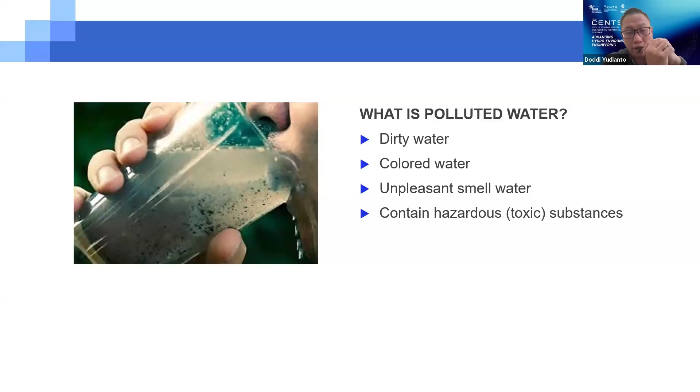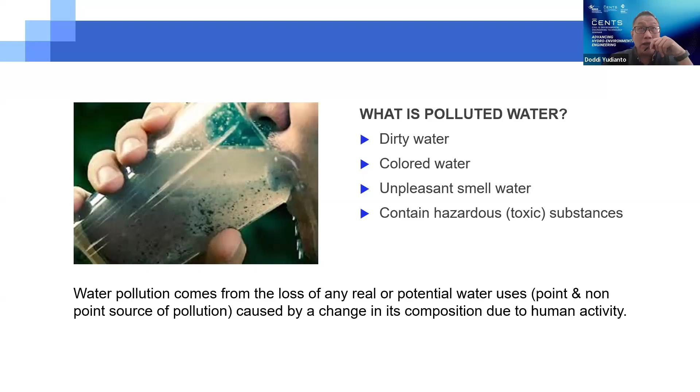Water is defined to be polluted if it contains toxic substances. And where do these toxic substances come from? It can come from the loss of any real or potential water uses. It can be point or non-point sources of pollution. Point sources can be like outfalls from industry, while non-point sources can come from agriculture areas or paddy fields. And because it contains toxic substances, of course, it will be very harmful for human health.

So the major questions are: what are the pollutants? When we define this as polluted water, what actually are the pollutants inside the water? Then, how badly is the water polluted, how rapidly is the water degraded, and how are the pollutants transported? And the last, most important thing for environmental protection and for us, is whether this polluted water is harmful to human health and how we can restore the conditions.

So the fact is, I think you are all aware that our environment is now badly polluted. We have so many regulations, but the implementation of the regulations is very weak. In many developed countries, they try to deal with polluted water using technology. While for Indonesia, we can say Indonesia is still a developing country, but to afford very expensive water treatment technologies, I'm not sure if all communities or even local governments can afford the financial side.

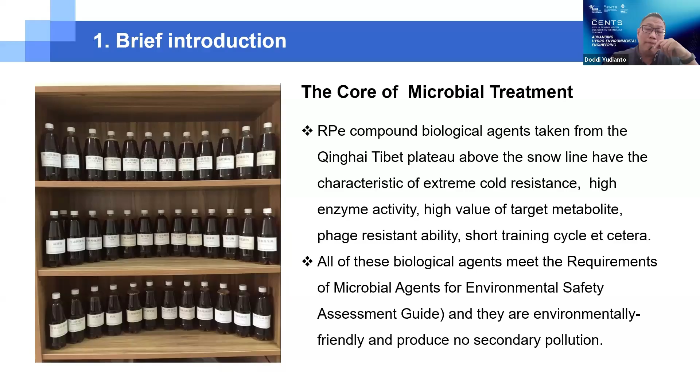He was thinking that when we go to very high elevations, this is in Tibet, where the elevation is above 5,000 meters, the oxygen is very limited. So when we extract the microorganisms, in this case certain types of bacteria, from the natural sites in Tibet at these elevations, we believe these microorganisms can help us decompose the polluted water.

Why? Because in polluted water, the oxygen is very low. So when we apply this kind of bacteria, hopefully this bacteria can help to decompose the organic matter or the pollutant itself. Of course, it's a natural process.

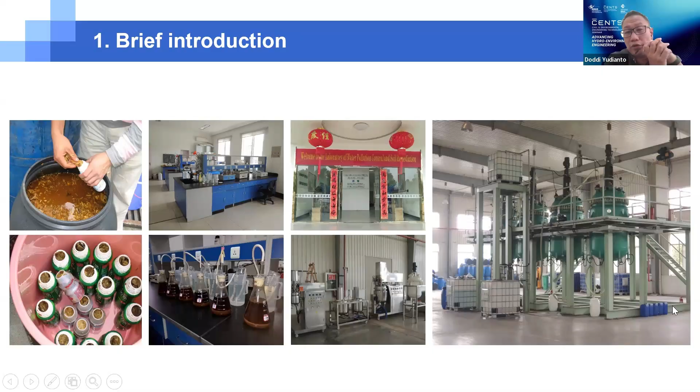And then they tried to culture the bacteria. As you can see here, they used Yakult bottles. So they put the materials into water, they try to ferment the bacteria, and then they test it in labs. And as you can see here on the right side, the biggest photo, this is the machine to produce the bacteria.

When my professor did these projects, he actually didn't know how much bacteria should be injected into the river, so he used trial and error methods. On June 4th, he injected about 0.8 tons of bacteria into the river. Then on June 13, he injected again 2.2 tons of bacteria into the river. And the last one is on July 31, about 1.5 tons of bacteria.

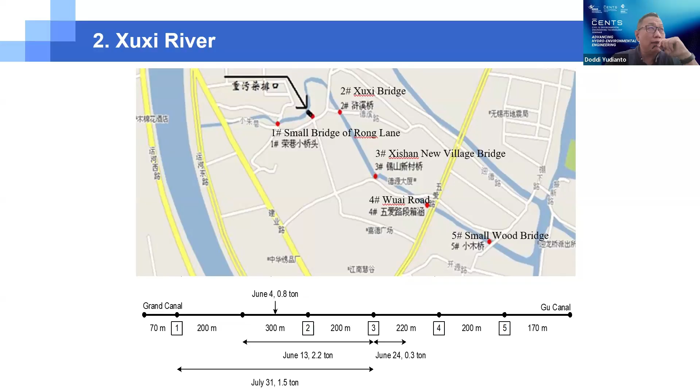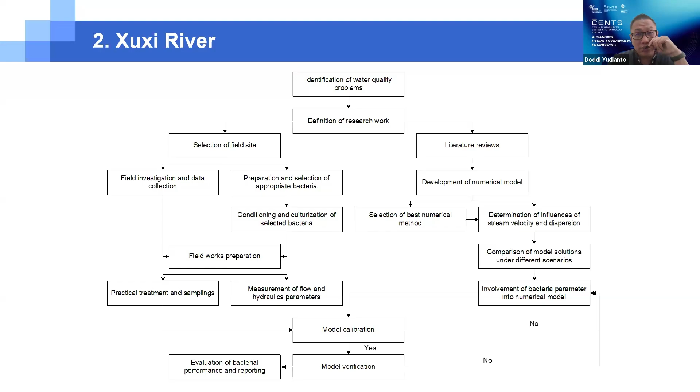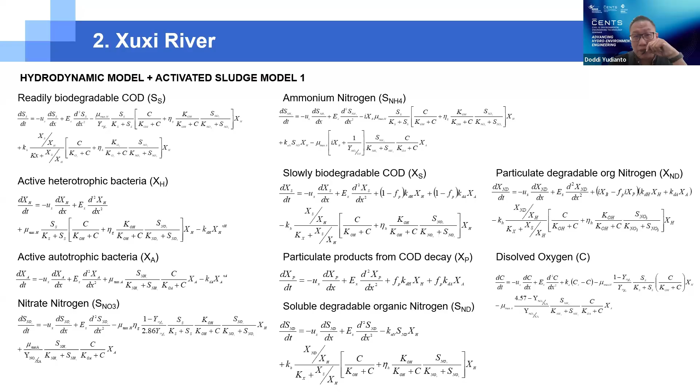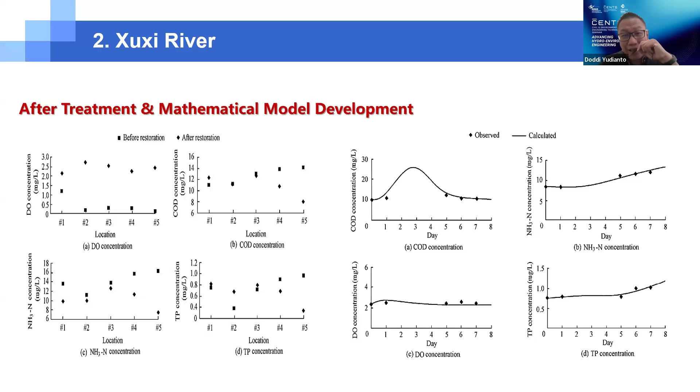And then by using my models, I could actually predict how the concentration of each parameter looks like. I did this for at least these 4 parameters, and it works well. So that means using this model, I can estimate how much bacteria should be used in the bioremediation process, where the bacteria should be injected, and when it should be injected again after the first injection.

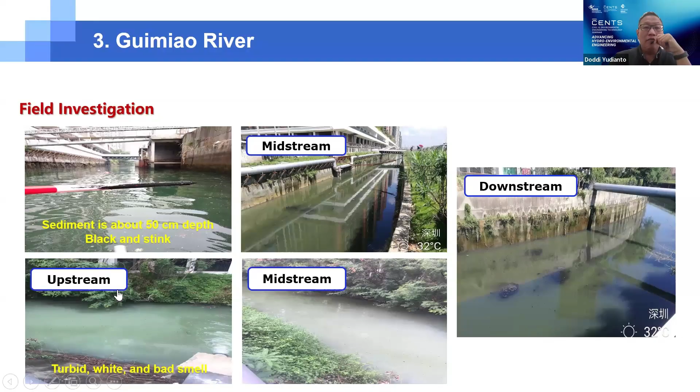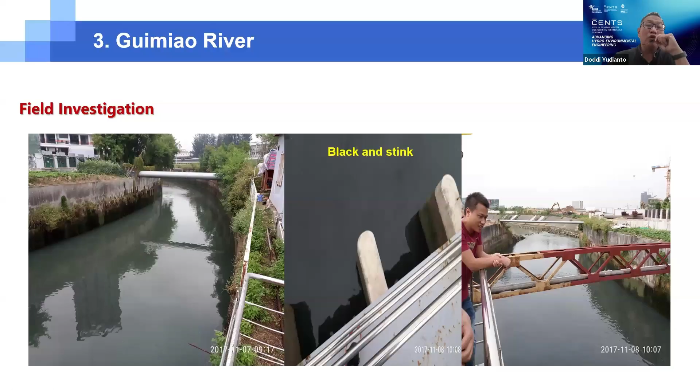And then this is a recent example of a bioremediation project. This comes from the Guimiao River. This is the situation of the river before treatment, from the upstream to the downstream. As you can see here, the color is very black, and it stinks. The smell is not good at all. And then we tried to inject the bacteria. This is now the bacteria.

They developed the technology. They don't only use the weir at the downstream, but they try to develop the bacteria under the riverbed. So how? This is the technique. They find certain types of stones where they can grow the bacteria inside the stones. Then they soak all these stones in the bacteria in very big tanks or reservoirs, ponds of bacteria, for about 1 month. And after that, they line all these stones on the riverbed.

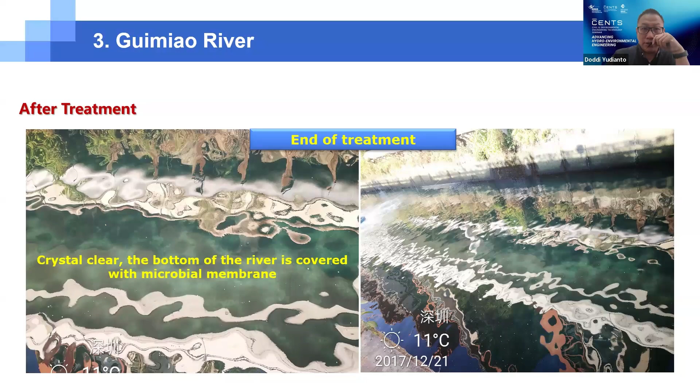And this bioremediation technology is not only used for rivers, but also for communal septic tanks. We also did a project at a communal septic tank in one school. This is the situation before treatment. A lot of waste inside the septic tank, and then we tried to separate the solid waste, and then we injected the bacteria. This is the result: 45 days, 90 days, and this one is after 135 days. You can see the water looks very clean.

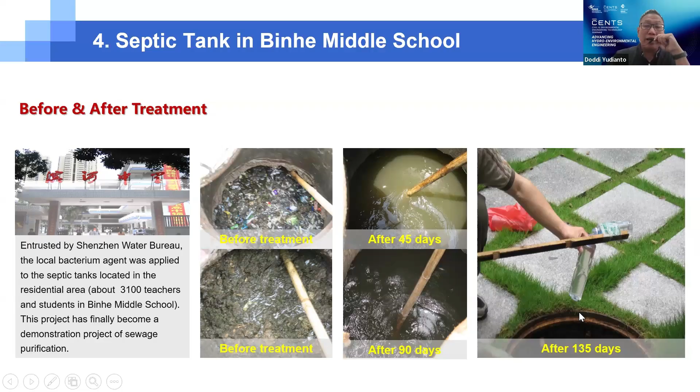And they also use the bioremediation technology to restore a reservoir. This is like a small dam. As you can see, in the initial condition the water looks very green, but after 1 month, this is the result.

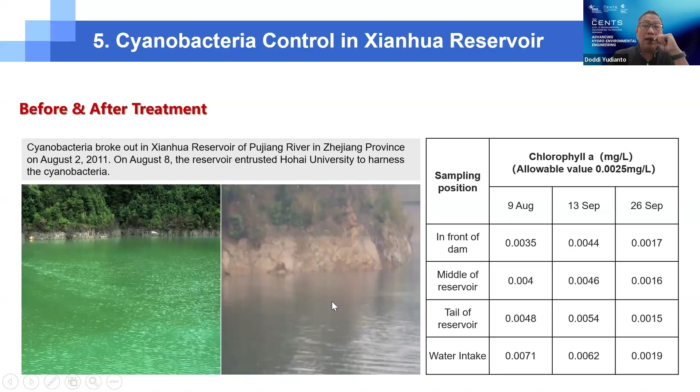And this is my photo, in 2006, when my professor took me to the wastewater treatment plant. This wastewater treatment plant was closed by the government because it discharged effluents beyond the national standards. So the government closed the treatment plant, and my professor was appointed by the government to solve this problem in 6 months.

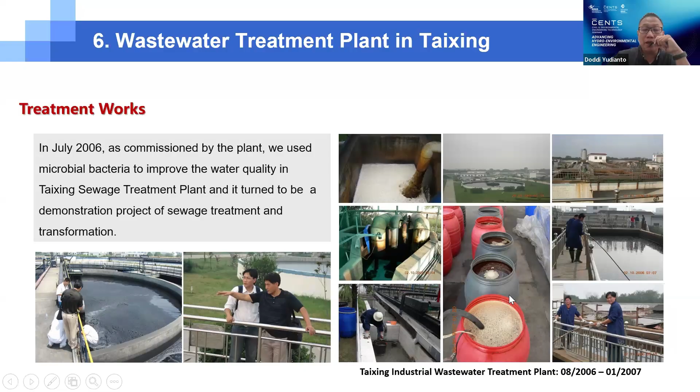So again we injected the bacteria into a treatment storage tank in the treatment plant. As you can see here, there are several processes in the treatment, but this is what is very important: the removal rates of the pollutants. One is the ammonia, and the second one is the chemical oxygen demand.

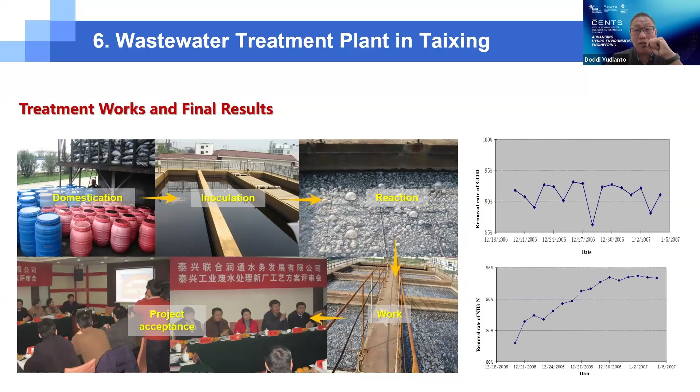The removal rate, both of them above 80%. Okay, so that means this technology works very well. Okay. And then this is also another example.

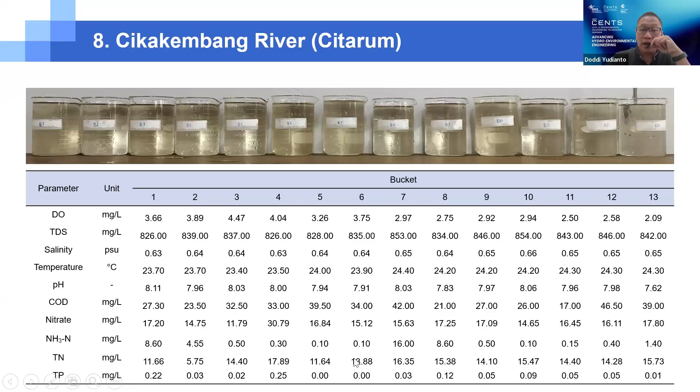So this is what we did, and then this is the last one I did also in Indonesia. I applied the bacteria developed by my professor in Indonesia in the Citarum River. As you can see, this is a laboratory test. We measured all the parameters, and then we observed for a few days. We tested the water for 9 days, and as you can see, the removal rates of COD, nitrate, total nitrogen, and also total phosphorus are very good.

So when we ask how we can apply this technology in Indonesia, of course, it's a very potential technology. But we have to be careful, because when we import the bacteria from China into Indonesia, there will be so many issues. So to deal with this, we have to develop the technology in our country. Okay, and then this is also another example.

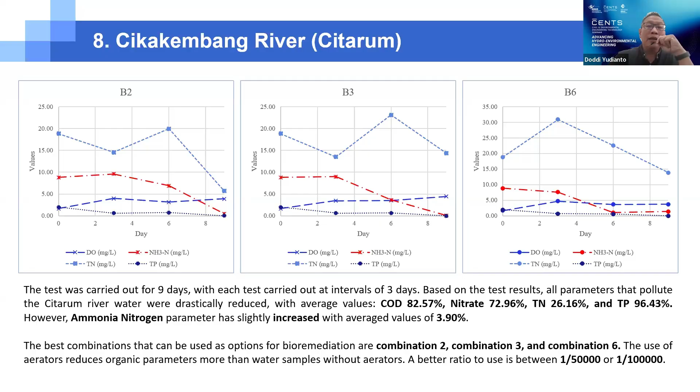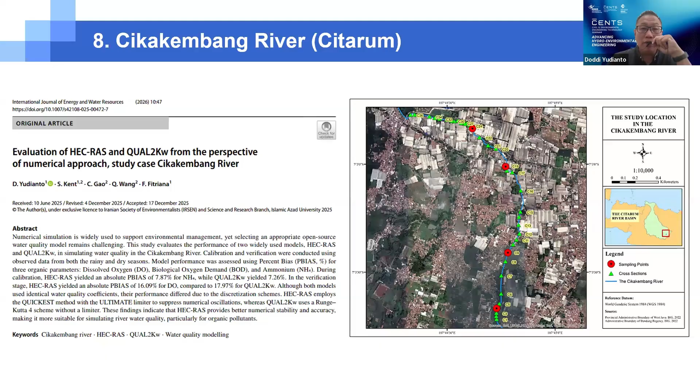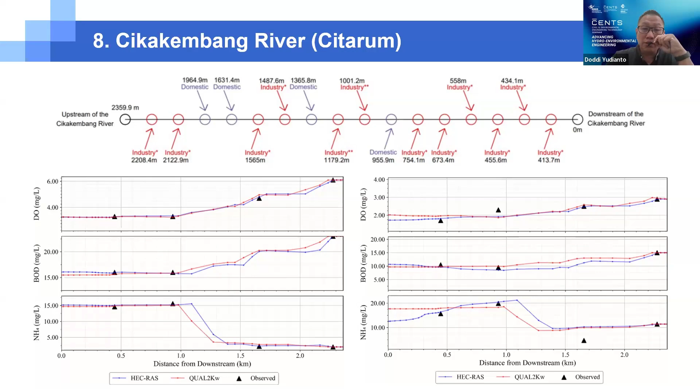So based on that, we did also some modeling. As you can see here, this is the river. Along this riverside, there are so many textile industries and so many housings. All of them discharge polluted water into the river. So we took samples along the river and then we tried to model it. We use two models. Here we use HEC-RAS; I'm sure some of you are already familiar with HEC-RAS. And we use another one, also very famous in water quality modeling, called Qual2KW. So we try to compare these two models: which one actually gives very good results?

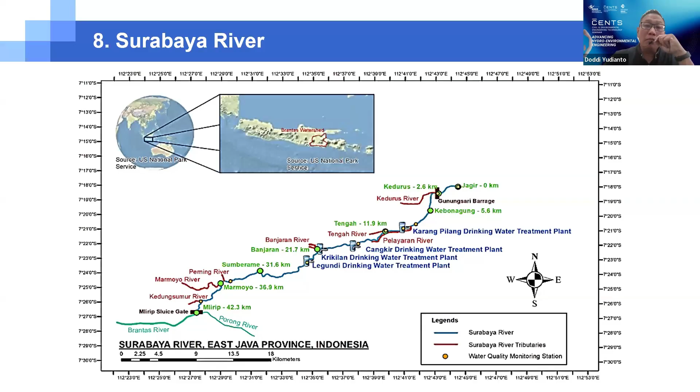And then this is another case. We use this modeling also to try to understand how the Surabaya River is polluted. This is the map of the Surabaya River. Along the Surabaya River, there are so many drinking water treatment plants, or PDAM in Indonesia. They take the raw water from the Surabaya River, treat the water, and then distribute the clean water to the communities. But this river was announced as very badly polluted.

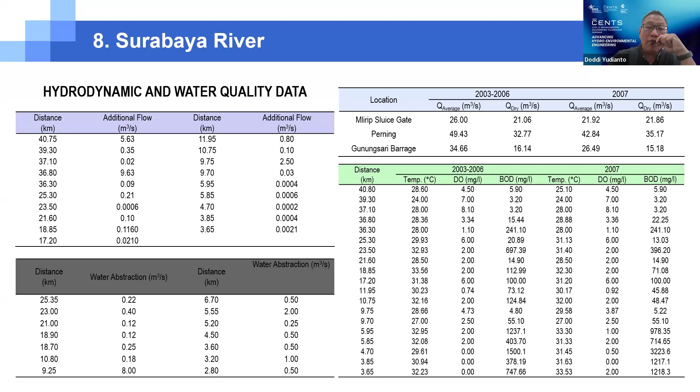So we tried to collect some data from this river. We have cross-section data, flow rate data, and also water quality data. And then we tried to model the water quality of this river. As you can see here, HEC-RAS works very well. Using this model, we can understand what is happening in the river, and we can also identify which sources contribute the most significant pollution into the Surabaya River.

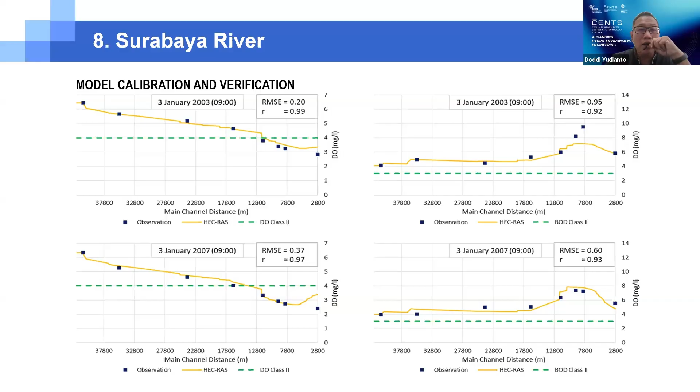So this is just very brief information I can share with all of you. I don't know if any of you are interested to study water quality modeling and so on, but this is a very promising field of research and also applications, because Indonesia is facing a very serious problem with water and environmental pollution. And there are very limited people who actually master this kind of water quality work. So if any one of you are interested to study this, you're very welcome, and I can share more studies related to water quality modeling.